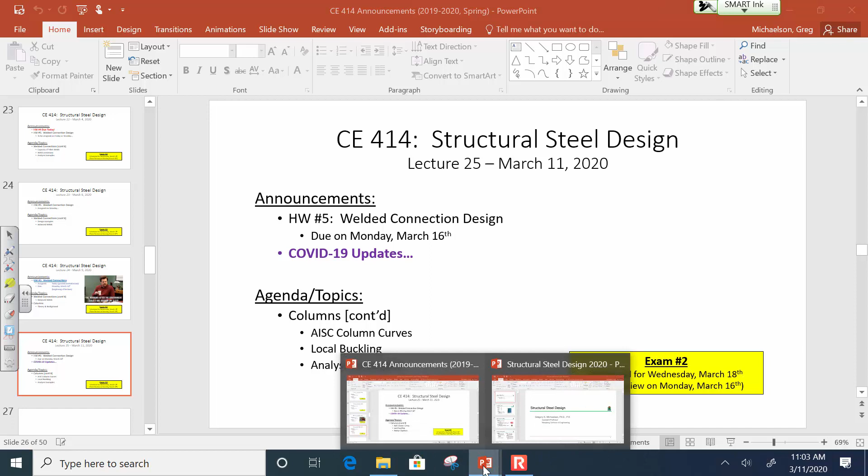Okay, I have a lot of stuff here on the board, and I want to take some time to digest it. So let's just get right into it. Let's talk about compression members, specifically their capacity.

We talked last time about this: Euler buckling, or the elastic buckling stress. We talked about how to derive that expression using differential equations, the assumptions that were made, and so on and so forth.

That equation is fine, except for the fact that there are two real-life issues that happen when we're looking at the behavior of a real-life steel shape. The first is the presence of geometric imperfections, the fact that this thing is not perfectly straight or perfectly plumb, and the fact that residual stresses are present from the rolling process. So geometric imperfections and residual stresses make this expression inaccurate, or not good enough to predict the capacity of a wide flange section in compression.

So what we do in AISC is use this. I want to explain what's going on in this chart. What I'm plotting here is a function - this graph is plotting the critical buckling stress as a function of the slenderness. One thing you'll notice is that the code calls this L sub c over r. That's the same thing as KL over r.

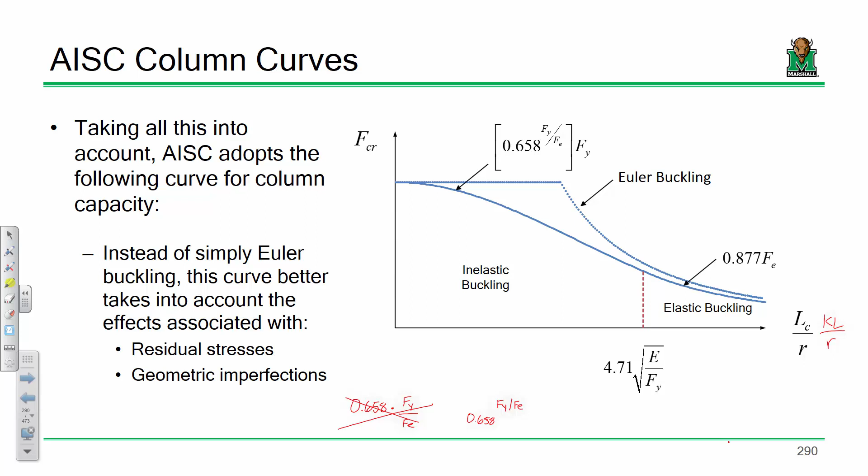Make sense? Okay, now, so how do we compute the capacity? The capacity is computed by taking phi times FCR times AG, so it's the gross area times the critical buckling stress times the phi value of 0.9.

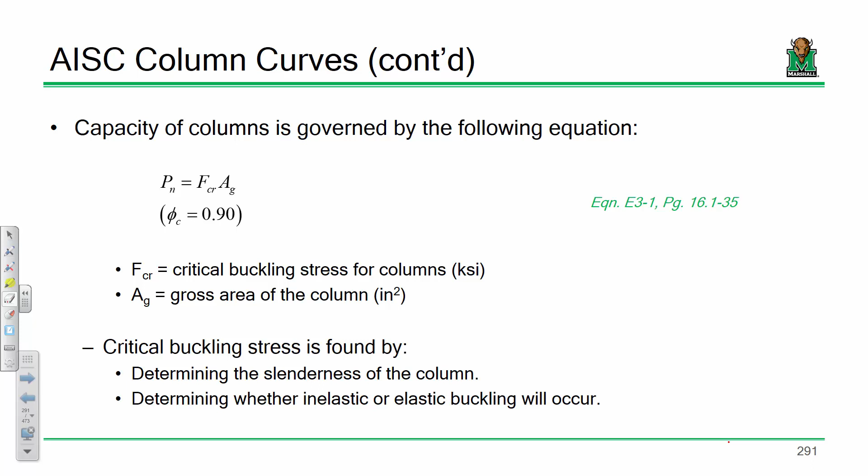So this is our critical buckling stress, in KSI. This is the elastic buckling stress, also in KSI. So our critical buckling stress is determined by figuring out whether we're in the inelastic or elastic buckling range, and also by determining the slenderness of the column.

Okay, so keep in mind, we have to determine this KL over R. KL over R—the R is the radius of gyration. The radius of gyration, when you look it up in the manual, is measured in inches, but member length is in feet. L over R must be unitless, so pay attention to your units when computing your slenderness.

E, the other term, is the Young's modulus, or elastic modulus for steel. Young's modulus, E, is 29,000 KSI. Fy is whatever the yield stress is for the grade you're looking at. And then L over R, or LC over R, is just KL over R, which is your slenderness.

Now, one other final point I'll mention: the expressions I'm showing you right here all assume doubly symmetric behavior, and all of the limits we're going to look at later all look at wide flanges. The long and short of it is that for now, until the rest of the semester, we're only looking at W shapes—no angles, no channels, none of that.

Because we're talking about beams and columns and buildings, and this is probably one of the most common elements that you use—except if you're designing a dorm facility from last.

Okay, inside joke. All right, everybody good so far?

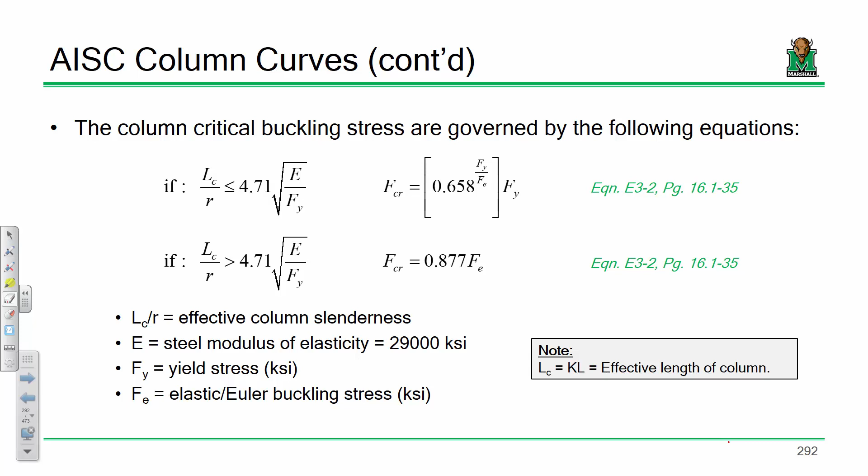In order to define that, I need to talk about local buckling. Okay, so here's my little rubber I-beam mock-up. Take the thing and I load it in compression. I load it and the whole thing bows out. This would be what's called a global buckling mode. The entire cross-section deviates from the longitudinal axis and just bows out. That is global buckling.

Local buckling defines a buckling mode where instead of the entire cross-section buckling, only a component of it does, like maybe the flange crinkles or the web crinkles. So these would be a couple of examples of local buckling. I've cheated on this one a little bit because it's from a fire that took place in England, but you can kind of see it's not like the whole column is busting out, it's that these flanges are kind of crinkling.

Does that make sense? So here's what we're sort of after: if we're considering local buckling, we're sort of asking ourselves, does the section look like this? Or does the section look like this? So the section here on the right, we would say that this section has slender elements.

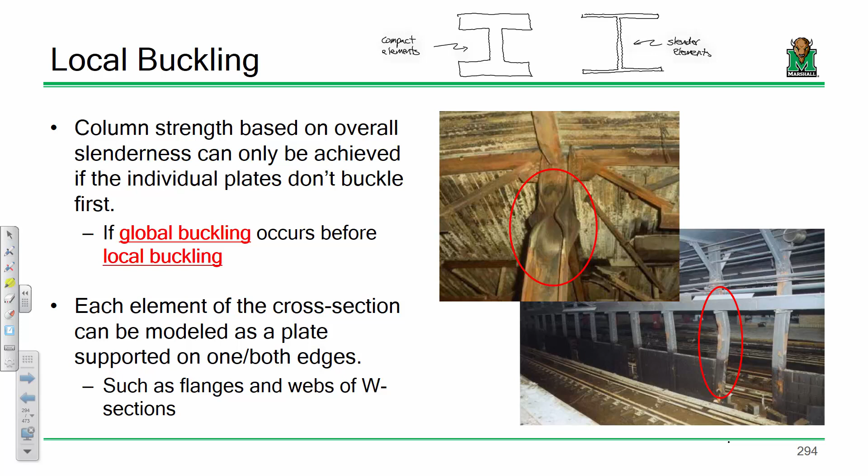I'll give you a hint, it's a subway. It's in New York, under the World Trade Center. This was a column failure of a subway support element under where the World Trade Center disaster happened. So yeah, this stuff happens in real life. I've tried to find a better picture of that column failure, but if you happen to find one, let me know.

Okay, now let me explain how you derive these limits. You don't have to follow along with this. Don't worry, this math gets a little out there, so you can sort of movie-time this bit. Now this expression here is the expression for the buckling of a column.

This is us deriving the buckling load for a column. This expression here is sort of the equivalent, but this is looking at the buckling of a plate element. Buckling of plates and plate analysis is definitely not something undergrads would be required to do, that's totally a grad school concept. But plate buckling, because it's like partial differential equations with respect to x and y, gets a little involved. Suffice it to say, this is the load that would cause a plate to buckle.

And it's a function of a couple things. We still have pi squared E, and we have this term here which you should have seen before, Poisson's ratio. Does anybody remember Poisson's ratio from deformables? It's like if I take a piece of taffy and stretch it, it gets longer, but it also gets thinner. The relationship between how much thinner it gets versus how long it gets is Poisson's ratio. Each material has a unique Poisson's ratio. The Poisson's ratio for steel is about 0.3, in fact the manual tells you to take 0.3 to be Poisson's ratio.

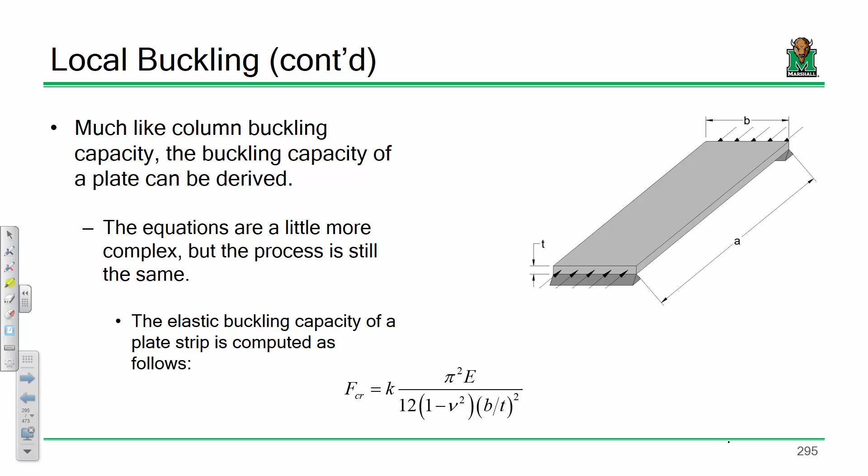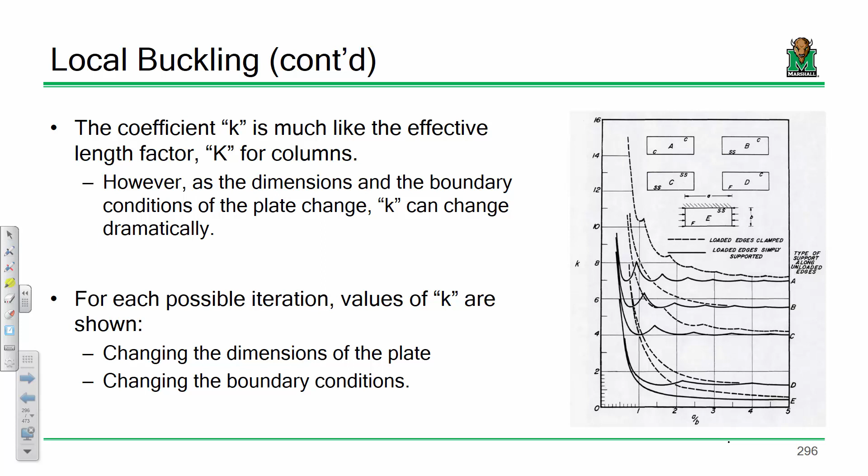It's also a function of your width to thickness of your plate. So the plate is B wide and T tall, so this B over T is a measure of the slenderness of that plate. Now this is your critical buckling factor, kind of like your K factor, but not really. If you start tweaking your plate slenderness as well as your boundary conditions, like is the plate simply supported, is it fixed, is it clamped, is it free on one end, fixed on one end, you start getting different values of K.

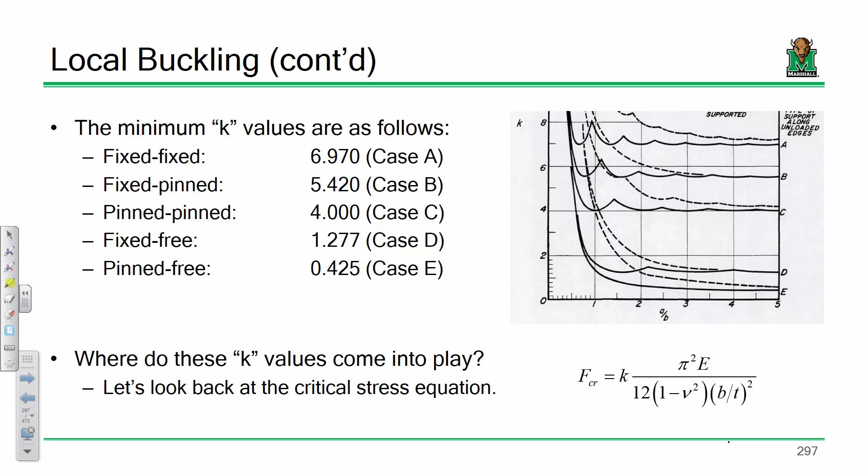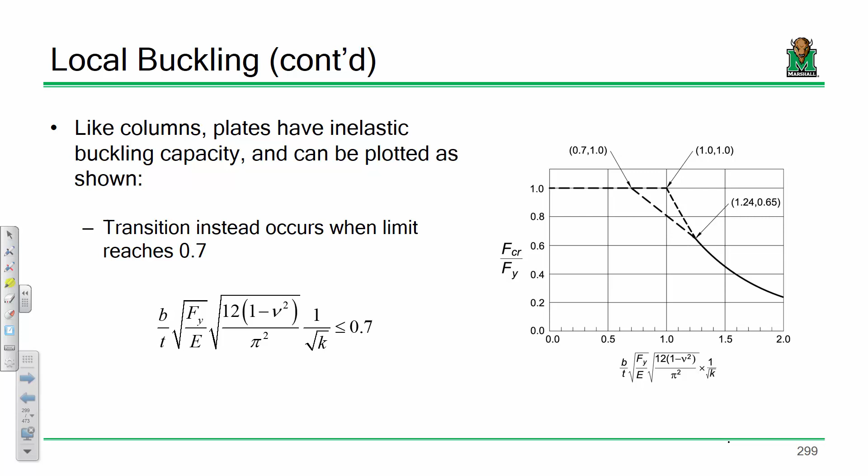This is like a grad school project if you ever wanted to try it. You can solve for K values assuming whether one end is fixed and one end is free, or both ends are simply supported, or both ends are fixed. The reason that's relevant is because you do two things. First you take this equation and rearrange it a bit to solve for this. Let me skip ahead a little so I don't bog you down with the math. So first you solve for the B over T ratio that will cause buckling, then you ask yourself, if I'm looking at an I-shape, what is the appropriate K value?

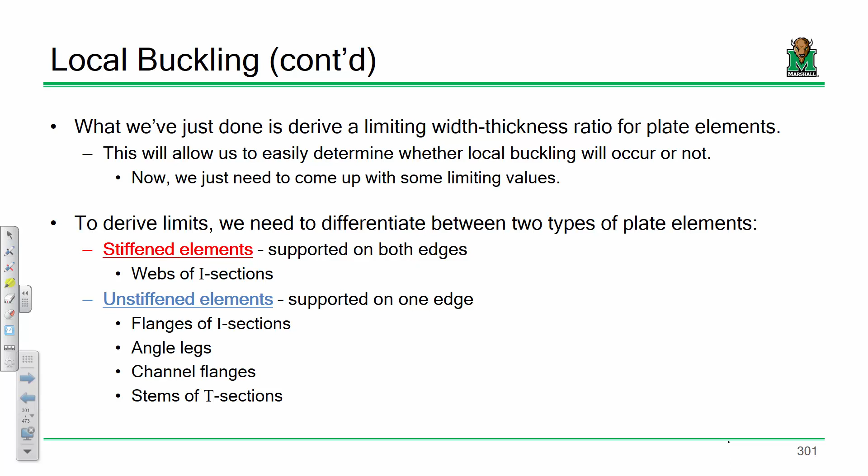Now the way we handle this in the spec is we split this up between what are called stiffened elements and unstiffened elements. So a stiffened element in an I-shape would be like the web, whereas an unstiffened element would be something like the flange. The reason we say that is because if we're trying to figure out whether this thing's going to buckle on its own, we call this a stiffened element because it's supported on two sides, whereas the flange is really only supported on one side.

The other side's hanging out in space. Now, I've got different K values as to whether or not these two ends are fixed, or these two ends are pinned. Maybe this is fixed, that's free, maybe this is pinned, that's free. So the final decision you have to figure out is, well, what am I going to do here?

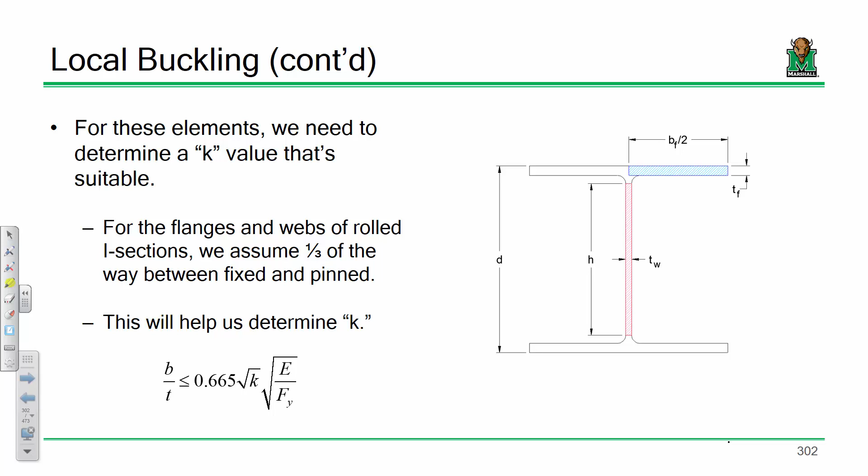Let me ask you this. Is that a fixed support? Is that a pinned support? Probably neither, it's probably somewhere in between. So what we do in the spec is say, okay, let's take this and say it's somewhere between fixed and pinned. So we pick a K value that makes sense, plug and chug, and here's what we get.

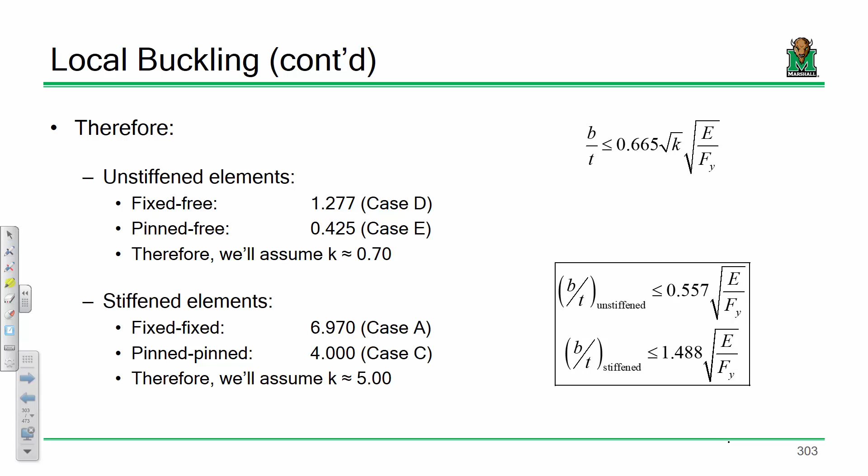So these limits that you're going to see here in the spec, that's where they come up with. We just look at it as if it's a plate. We limited its buckling stress to Fy. We solved for the B over T ratio that would cause that, and there you go. I don't want to bog you down with the math, I just want to keep it straightforward.

I want everybody to turn to 16.1-17, which, by the way, if you look here on the board, you see this little section where I say manual tabs. I have a number of sections that I think you should tab for columns.

Now if you look at 16.1-17, no, go back a bit, right there. You should see a table that looks like this. It should say B4.1a. Now look at the title of that table. What's the title say? It says width to thickness ratios, and it says members subjected to axial compression.

Now just for giggles, turn the page. What does the next one say? For B4.1b, it says members subjected to flexure, right? So here's the long and short of it: B4.1a is the table we use for columns, B4.1b is the table we use for beams. We'll be using B4.1b later.

Now if you look on the left of that table for B4.1a, back page, other way, right there. So on the very left, the text is sort of tilted. You should see where it says unstiffened elements and where it says stiffened elements. Y'all kind of see what's going on there? Now what we have here is we're looking at unstiffened elements and stiffened elements.

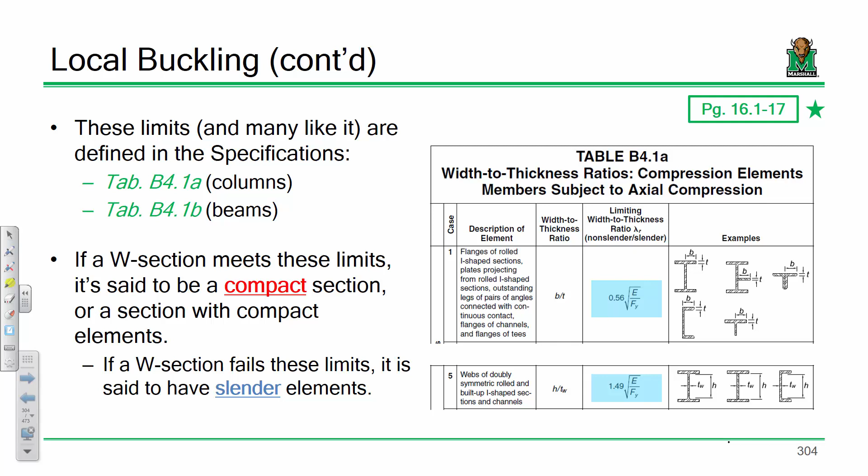Now, one of the things that you will notice is, let's just look at a W10x49. It doesn't matter, if you look at the W10x49, look to the page on the right. And if you look on the column above, you see where it says compact section criteria, and see what it lists? It says BF over 2TF and H over TW. So the spec already lists for you the flange slenderness and the web slenderness. You don't need to go and compute that.

Now, why is it BF over 2TF? Because I'm only considering half the flange, that limit over there on the left. And so if you notice, those are already sort of computed for you.

Now let me be clear. What if you fail these limits over here on the right, like what if your flange is too slender? That does not mean that the column explodes upon putting a feather on it. All that means is that if you fail these limits, then these equations over here on the left just don't work, and you have to use different equations.

Those equations on the left board are from section E3. Look at the title of section E3: flexural buckling of members without slender elements. Section E7: members with slender elements. So whether or not you fail this limit on the right tells you whether or not your section contains slender elements. Make sense? Now let me show you something else.

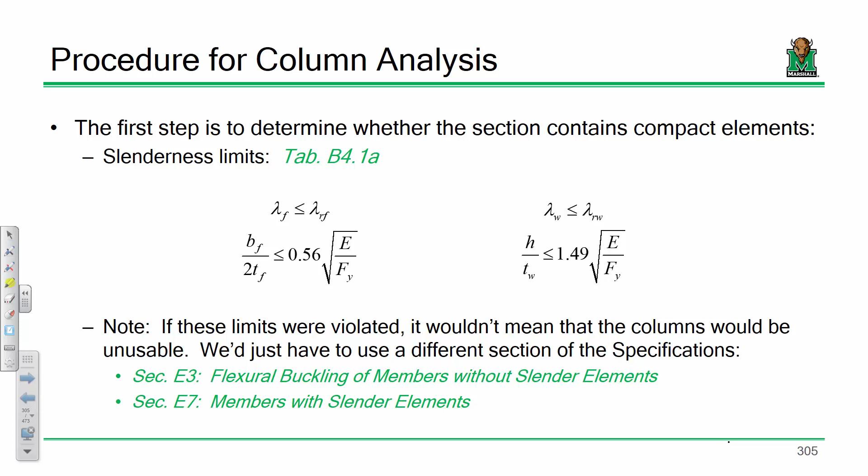Ask, is your flange slenderness less than or equal to this limit? And is your web slenderness less than or equal to this limit? If that is the case, then you're good to go using section E3. If not, you got to use section E7. We might talk about E7 at the very, very end, but most wide flange columns, that isn't going to be a problem. I'm still going to make you check it, but it's probably not going to be a problem for what we do in here.

Now, once you verify that the section is compact, there's actually 3 different ways to compute the capacity. I have a typo here. I said table 422 - I'm sorry, it used to be table 422. It's table 414. I apologize for that. That's table

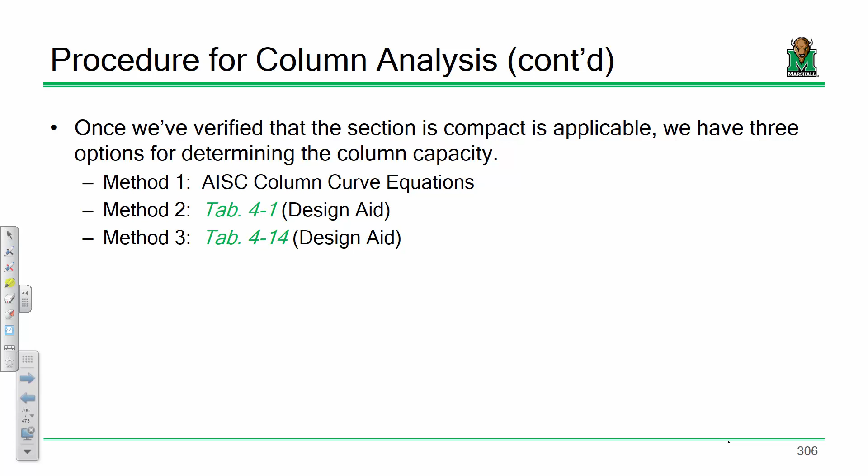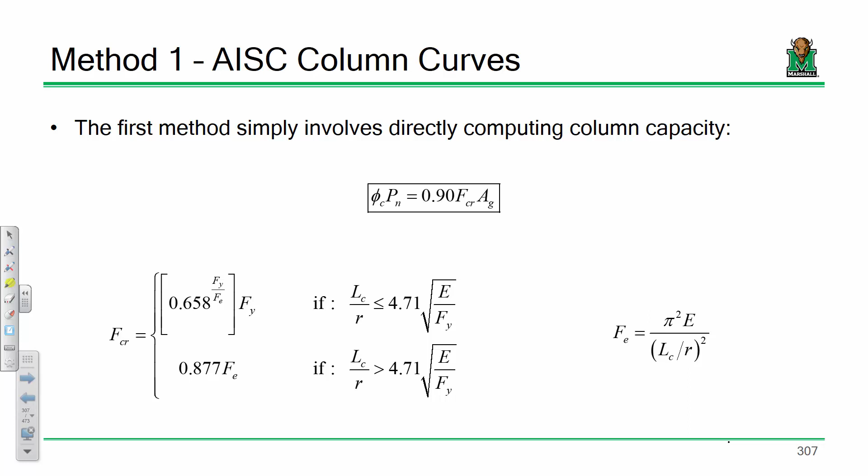4. Now, if you have determined that your column is in fact compact, that it does not contain slender elements, there are actually 3 ways to determine the capacity. The first is to just use these equations. The second is to use one of the 2 design aids in the manual, and we'll go through each of these in detail. So the first is just to use this. So just so you're aware, we have this one example we're going to do 3 times, and it's going to be looking at each of these different methods.

Now, I know I keep harping on before we start doing our example, but this is probably, if there's any one thing about columns that becomes complicated, it's the slenderness.

Now, if ever you look at a W section, there's always 2 radii of gyration. There's an Rx and an Ry, the radius of gyration about the x-axis and the radius of gyration about the y-axis. And Rx is always bigger than Ry. We always call the x-axis the strong axis. Like if I take this, it is easier to bend it about the weak axis. It's easier to bend it this way than it is to bend it this way. I mean, you can feel it if you bend it. It's kind of flimsy this way, but this way it's got some oomph to it, okay?

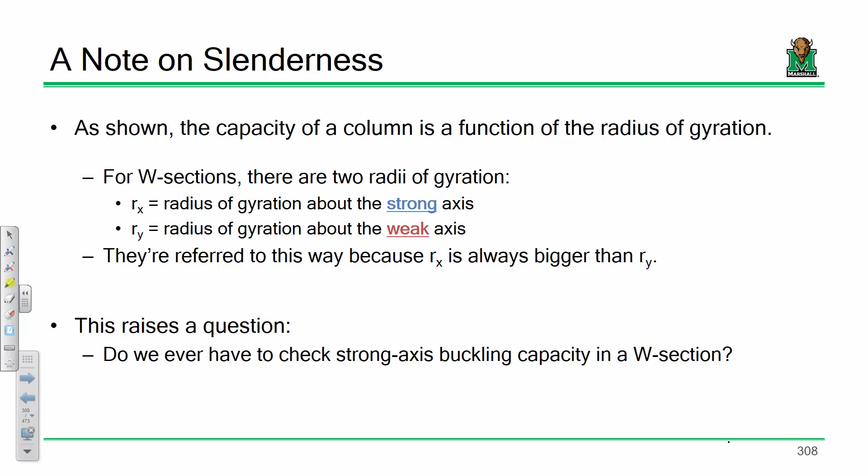Well, the question is, do you ever have to check the strong axis? And the answer is yes. Let's take a look at this column. So this column, I've got bracing about the y-axis, but not about the x-axis. So if you look at the x-axis, this column is completely unbraced for a length of 35 feet. But for the y-axis, I actually have different sections. I have a section here that's 10 foot long, a section here that's 15 foot long, and another section here that's 10 foot long.

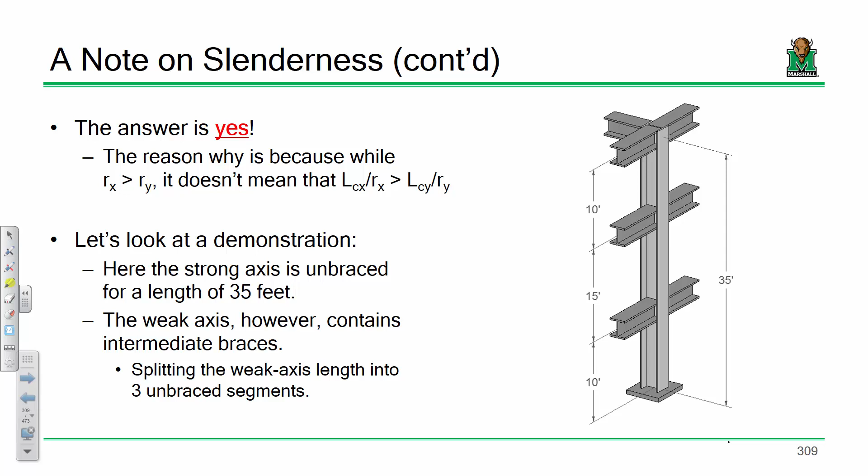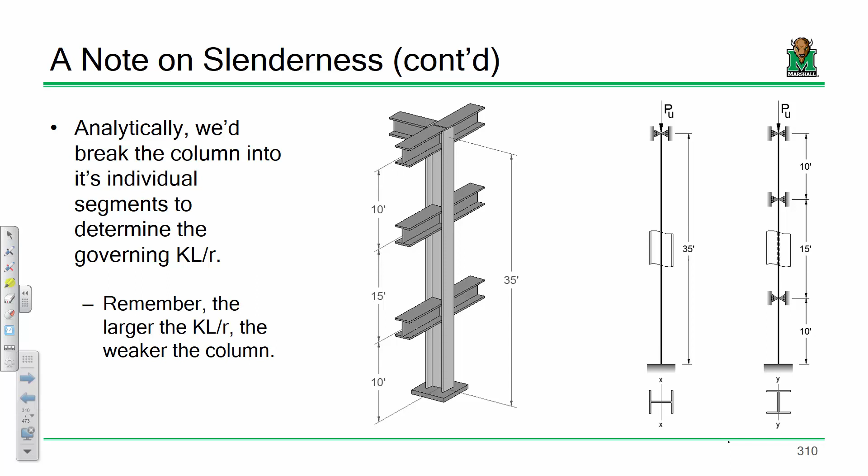So make sure you always check the KL over R for each axis. In fact, we're going to take this column, and so what you would do with this column is you would actually split it up into 2 different analysis models, one for the x-axis and one for the y-axis. In fact, why don't we go ahead and just do that example. So I want to analyze this column. We're going to assume it's a W14 by 90 made out of grade 50 steel. And I've got the strong axis bracing on the left and the weak axis bracing on the right.

Now I'll go ahead and prepare you. We're going to be doing a lot of flipping back and forth in the manual here. So there's going to be a lot of parameters that we look up. So just be aware of that.

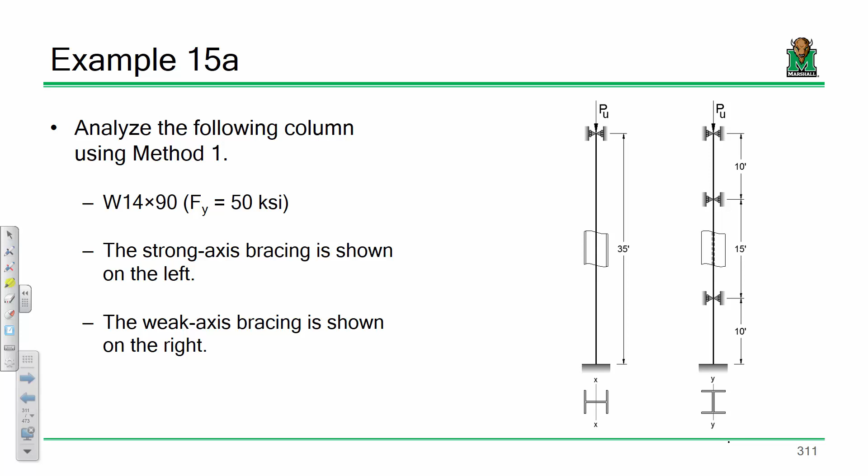Okay. Give me a sec. Oh, I didn't open my notes. Okay.

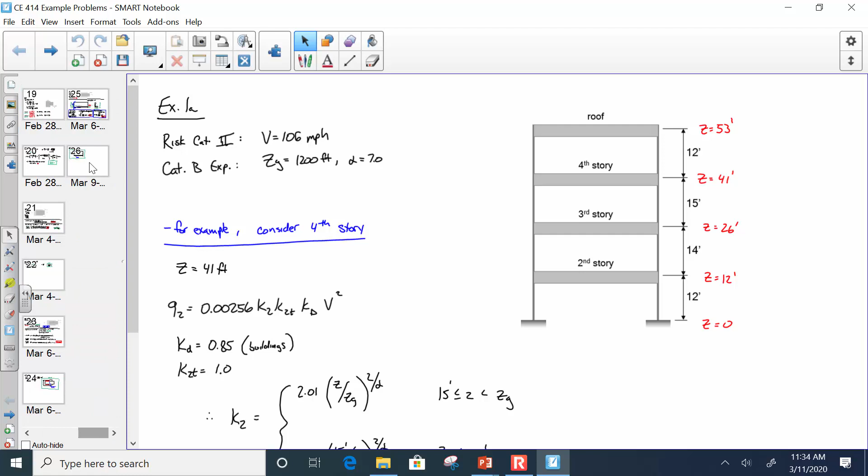So, first off, we're dealing with a W14 by 90. We were told that Fy is 50 KSI. So I need a couple properties from this section to be able to do this problem. The first thing that I need are some section properties. So I'll go ahead and tell you I need AG, RX, RY, and I need my flange slenderness, which is BF over 2TF. And I need my web slenderness, which is H over TW.

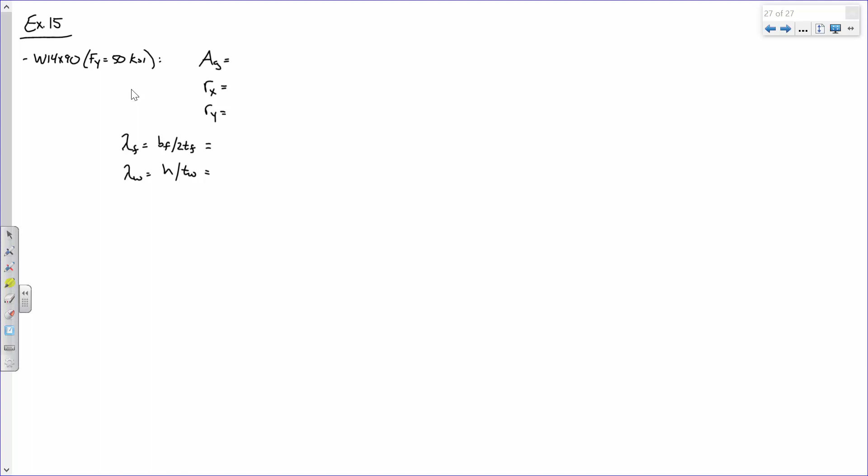So help me out. What's the gross area of this column? 26.5. All right, what about RX and RY?

RX is 6.14 and RY is 3.7. Okay, and lastly, the compact section criteria, the BF over 2TF and the H over TW.

It's on the next page. 10.2, 25.9. Now, what are the units of the compact section criteria? There are none. It's BF over 2TF, inches over inches. They're unitless.

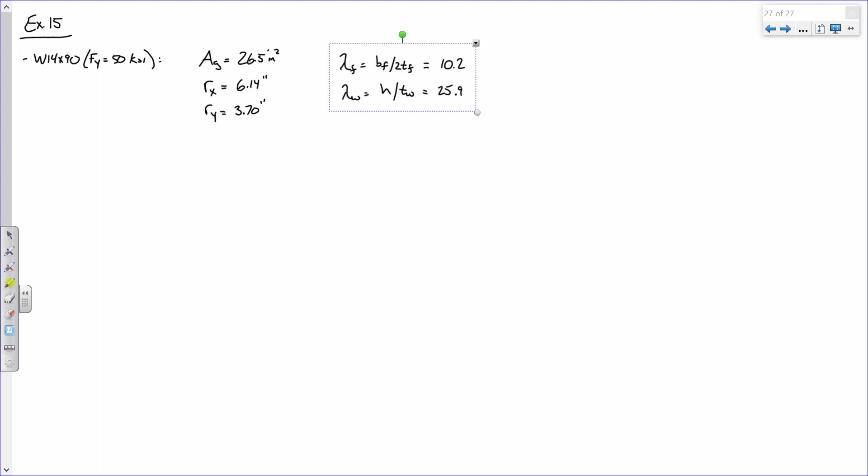Okay, now the first thing we're going to do is check these. Okay, so let's do that. Let's start off here. I'm actually going to move these up here, I have a little bit more room. Okay, so we're going to check local buckling first.

So the first thing, let's look at lambda RF for flange. 0.56 square root of E over Fy. 0.56. We have that. Let's see what we get.

13.49. Do I have a second on that? Yes. Okay.

Now sometimes students get a little confused about this. I want to make sure this is clear. Okay. Lambda RF is 13.49, Lambda F is 10.2. This is the limit, this is the actual slenderness. Remember, as slenderness values get higher, the flange is going to get more and more flimsy. Okay, so if the slenderness was larger than this, we would have a slender element. But we don't. So because lambda F is less than lambda RF, we have a compact flange.

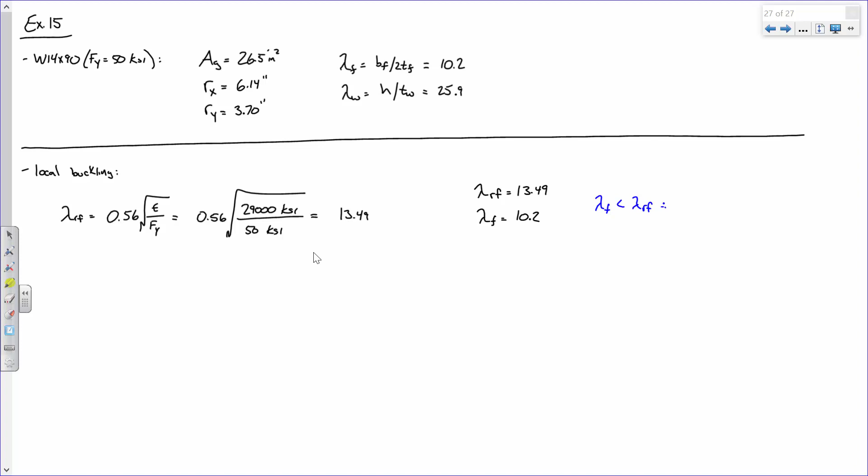Does that make sense? And that just means we can use these equations. Yes, but we're not done. We got to do E7. Again, if you fail this limit, it does not mean that the column will explode if you put a feather on it. It just means that those equations are wrong, or at least not good enough by themselves.

So 1.49 E over Fy. Anybody have an answer for this one? 35.9. Okay, so.

And then this is 25.9. So what's going on here? So this is the measure. This is the limit, the maximum slenderness limit before we have to declare the web slender. But this is how slender it actually is. So do we have a compact web or a slender web? Compact web, there we go.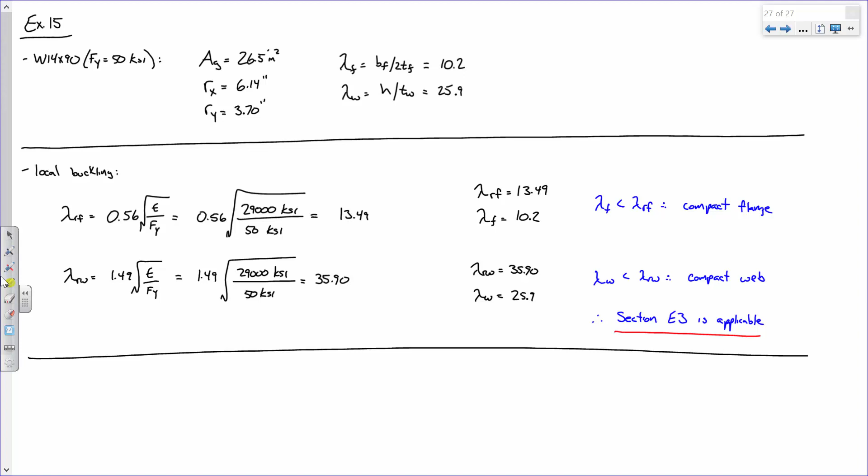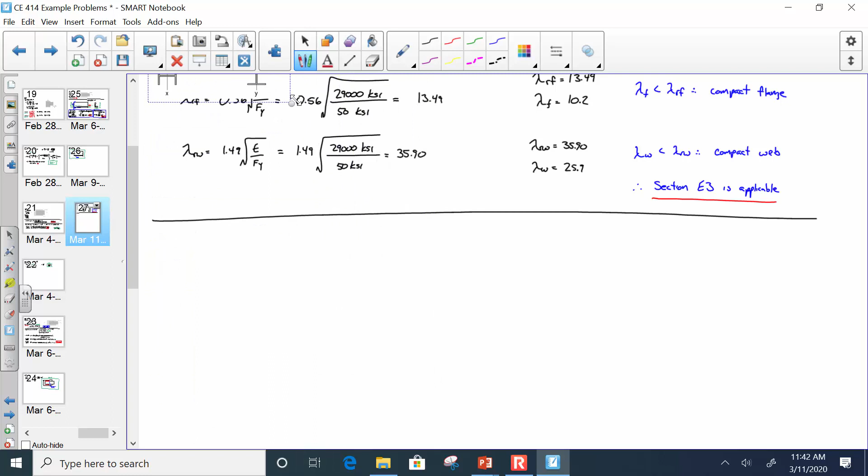Come on. We're getting there. Let's get that. Okay, so let's take a look at the bracing situation.

I've got my R value. So when I say slenderness, I mean KL over R. I know my R values, I just looked them up. I can get the lengths right here. That means we need to look at K values. So where do we look up K values?

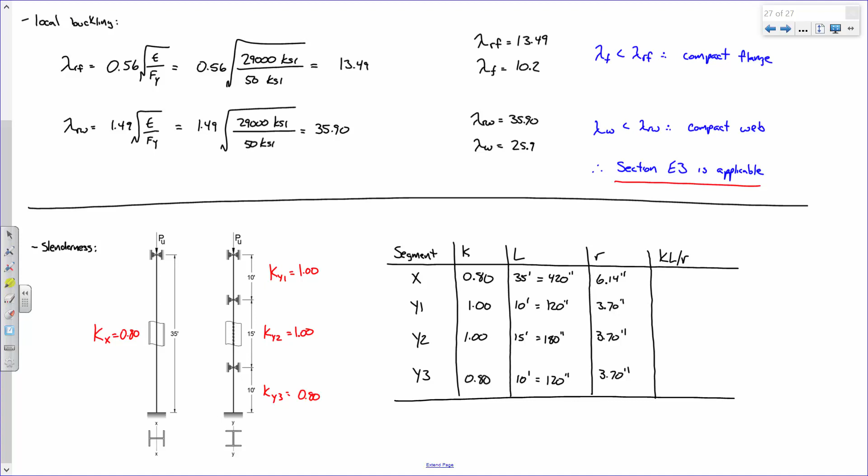And so KL over R, we're not going to have time after this, so we're just going to call it. So give me the first one, let's say like 2 decimal places, probably close enough. 54.72. Okay, what about the next one? 32.42. Next one? 48.65.

And the last one. Wait, what? 25... say it again? 25.94. Okay, yeah, that's what I got.

Now, I want everybody to pay attention to this and we're going to call it. First off, which is the highest value? The X one. So this column is actually going to buckle about its strong axis before it buckles about the weak axis. It may have a larger moment of inertia and a larger radius of gyration about the strong axis, but because the strong axis is unbraced for a distance of 35 feet, it's going to buckle first. So that would be my first point.

My second point is we actually wasted our time a little bit because if you look at the y-axis, I have 3 segments, but look at the center segment. The center segment has the largest K value and simultaneously the largest length. So by observation, this was going to have the largest slenderness of all 3. So if you wanted, you could have just computed the x-axis and then just that one for the y-axis. For posterity I went ahead and did all of them, but upon observation really all you need to do is this one.